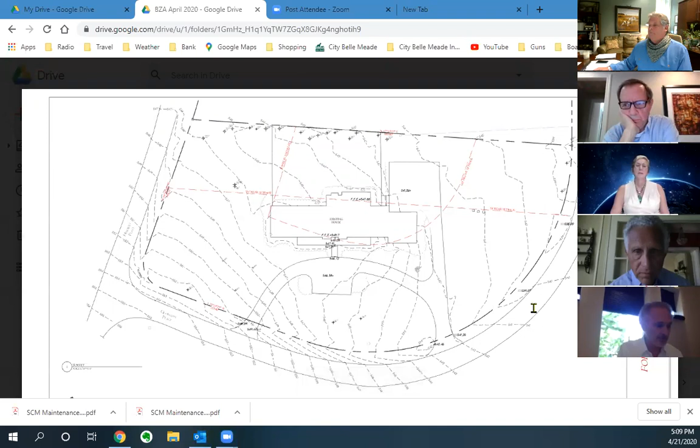Last time we met, I guess we were over at the church, and we submitted it, and our setbacks were such that we really didn't have quite a building envelope. And so we presented the pool, which was on BZA-3 sheet. As you can see, it was fairly close to the back door, and a couple of board members had mentioned maybe moving it out so it wasn't quite as much of a hazard for the residents. So we moved it slightly. It's a 14 by 30 pool.

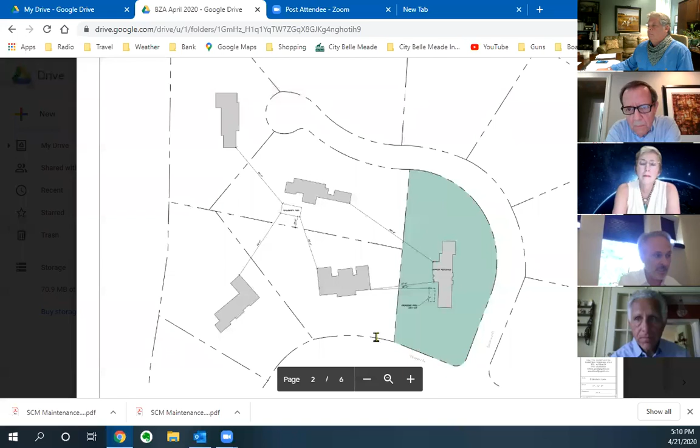And as you can see on BZA-2, the neighbor was actually there last time. They may be speaking today, but we did meet with them, and the pool that's adjacently behind them is about 25 feet off of the property line. We're significantly further away, but our lot is such that the hardship, I think, is that we have space on both sides of the lot, but we really don't have that much of a rear yard.

And so we were asking to get a pool in the rear. All of our numbers and all of our ratios are within the allowable. Our fencing we have going off of the rear of the house. We tried to make the best for a small space that we could.

Thank you, Gavin. Does anybody else want to speak on your behalf or the owner's behalf? I'm not sure today. I know Emily may be on here and Colin, but not sure if they have anything to say.

All mics are open for public comment. No, this is—

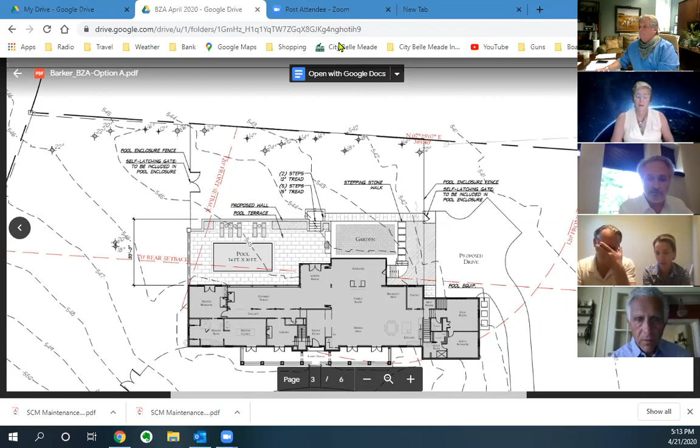This is Joe Dugman. Gavin, the pool is still outside the building envelope, is that correct? It's a little further out. Last time we had about two-thirds that was out, and it may be just a little bit further out. We shifted it about 2 or 3 more feet to the west.

Lyle, can you show us the building envelope on any of these documents? Yeah, it's right there. I'll do my best to outline it here. So this would be the rear setback here, this is the 70. And the front setback follows the curvature of the street that you see here. That is the building envelope.

Are there any more comments or questions from Gavin Duke or his client, from any of the board members? Any questions of them, Gavin? I have a question, Doug. This is Pete Savasky. Is there a wall around that terrace?

It is 3 feet elevated to be level with that rear covered porch, and it's 30 inches, I'm sorry, and we have a railing that goes around it, but there is no wall. Okay, so the barrier is 6 feet tall? Yeah, there's a 3-foot wall on the south side with a 3-foot railing on top of it, so that meets the 6 foot, and then there's a 6-foot fence that goes to the property line.

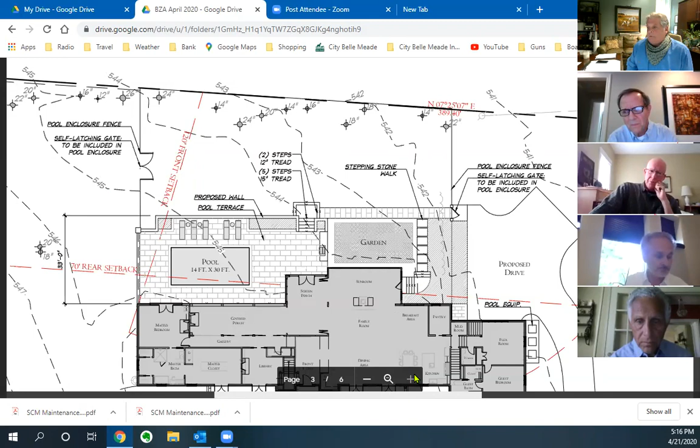And you'll see in the planting plan, which is on BZA 5, that after we spoke to the neighbor, we had evergreen screens on the west side, which is the rear of the lot, and also along Herbert Place. So most of that is evergreen planting that will screen that from traffic and also for the neighbor in the back, and to the north.

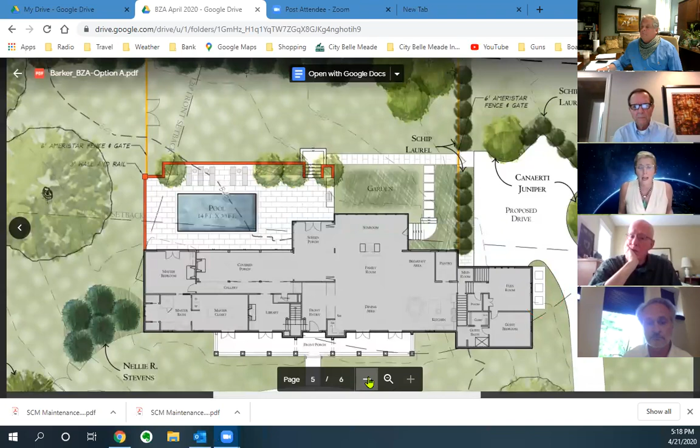Are there any more questions of Gavin Duke? If not, I'm going to... Yes, this is Gloria Sternberg. I wasn't at the last meeting, so I'm not sure what questions were answered in terms of it being outside the building envelope. I realize that it's an unusual lot, but I'm not sure that we've approved a pool outside the building envelope in a long time.

Yes, we pushed it further in toward the house, and it seemed to be a hazard. Maybe they felt it was a tripping hazard going out of that covered porch area. And our case was the fact that we have an adjacent touching lot with a pool that's in further violation, 25 feet from the property line. So we were really hoping we could get a small entertaining element like a pool, because we don't have any place else to put it on this property.

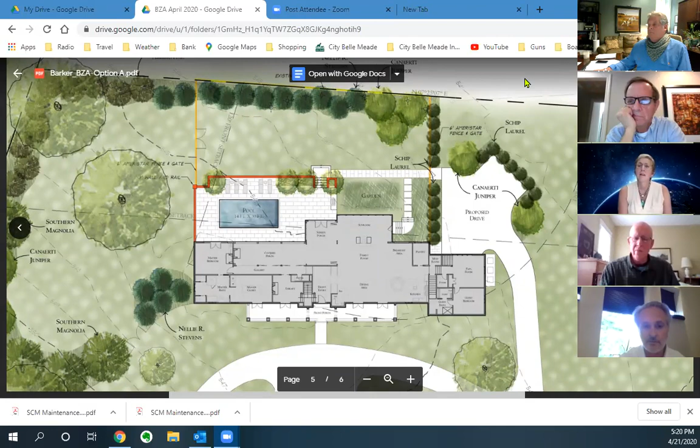When was the previous pool built? This is Gloria again.

Now, Gloria, when you say previous pool, what are you referring to? Oh, the neighbor's pool. That's probably a long time ago. It should be in the minutes of the last meeting that was discussed. This is Colin Barker, owner.

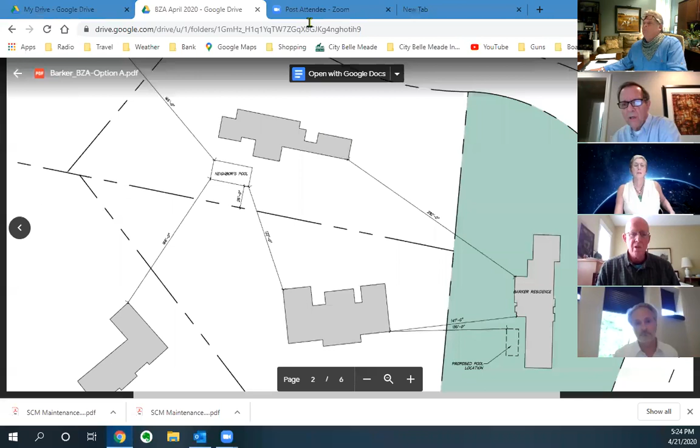Mr. Chairman, if I may interrupt, this is Ted Maiden. I am the neighbor immediately to the west of the Barkers, and by the way, Barbara and I look forward to the Barkers being our neighbors and friends. My wife Barbara was the one who spoke to the board. Just to clarify a point you made a moment ago, we do not have a pool. It is the Nallies who live behind us on Georgian Place who have the pool. And just to clarify a historical matter, that pool has been back there for a long, long while.

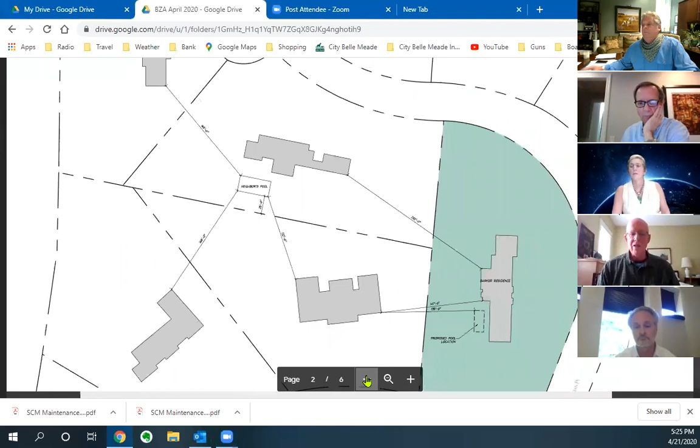Is the floor open for public comment, or is the procedure that the Barkers and their professional guides have the floor? Well, I asked for anybody to make any comments, and I did close it.

However, I don't have a problem if the rest of the board didn't have a problem with this gentleman speaking. Is everybody okay with that? Yeah, I'm okay. Okay, so my apologies, I had to fumble with getting unmuted, so that's on me. I finally figured it out.

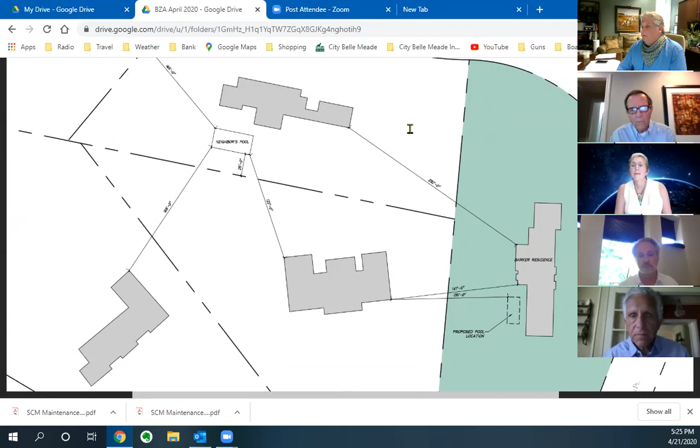I did have an opportunity to send mine and Barbara's thoughts on the matter to Mr. Patterson. If those are already in the record, there's no need that I see to take the board's time and the time of others attending the meeting.

Lyle, do you have his comments that he's referring to? Let me just put this up.

I'm happy to summarize them if the board, the chair sees fit. Go right ahead, just summarize them please.

Sure. Well, quite candidly, our concerns are not those that are immediately before the board. As far as Barbara and I are concerned, that's a decision for the appropriate body to make.

But the circumstances are such that the area of our home most proximate to the proposed pool is our master bedroom and bath. While it is true that the other pool we spoke of may be closer or further, that other pool faces the back of the house, and it has a stucco or somewhat substantial wall of about 6 or 7 feet, so we never suffer a disturbance from any activity emanating from the pool equipment or related activity.

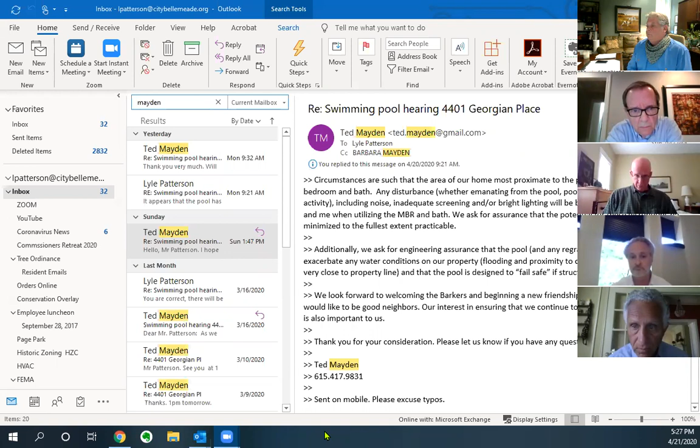So the proximity of our master bedroom does raise some concerns that Barbara shared with the board, and perhaps with the Barkers as well, about noise and screening and bright lighting, that in the event there are any disturbances, those will be borne most acutely by Barbara and myself when we're utilizing the master bedroom and bath.

I'm not embarrassed to tell the board that as we age, we spend more time sleeping and in the bath. In any event, our concern is entirely assurance that the potential for these disruptions will be minimized to the fullest extent practicable.

Additionally, we have an engineering concern, which is something I am way out over my skis on and will defer to the experts present in the meeting, that if there is any regrading or other engineering, earth moving, or the like that does occur in the process of constructing any pool, we would ask for assurance that it will not create or exacerbate any water conditions on our property - flooding, proximity to our septic, which is very close to the property line. And obviously we're confident that the pool will be designed to fail safe if it was structurally impaired.

But as I mentioned earlier, we're happy to let the chips fall where they may. Our concern is the particular circumstances, and that is the proximity of our master bedroom to the pool.

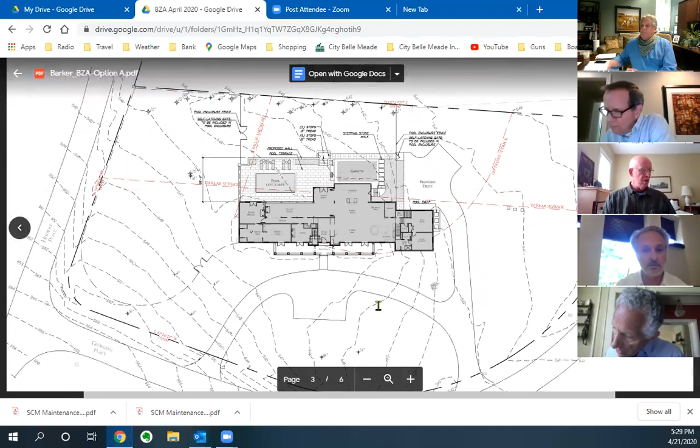Is that correct, Gavin? No, it is before the board. And just to add to that, I think it didn't say so on the agenda - that's the reason I'm confused about it. Oh, it is on the agenda. Yes, I'm sorry, it does say that. My bad, it didn't say it on the sign though.

And just for the record, the civil engineering and the stormwater study is required for a pool, so we will have full drainage.

Anybody speaking, I can't hear him. This is Gavin speaking, right? Yeah, Gavin Duke. Just reiterating the fact that stormwater and drainage would be a part of all this study with the pool, so there would be no more water for that back area.

Anybody else on the board want to make a comment or question? Can you pull up the landscaping plans, Lyle?

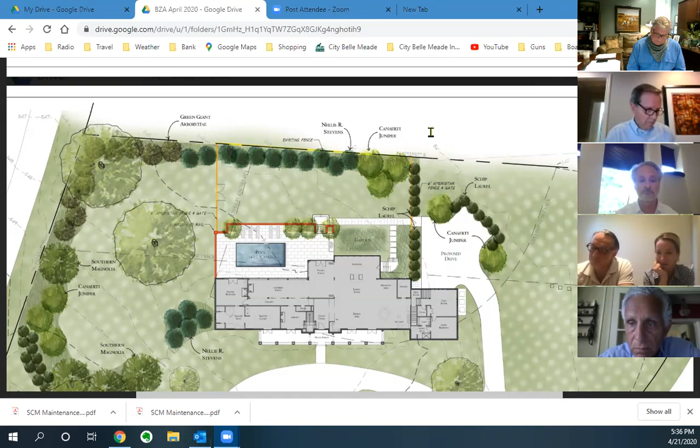But I do not believe that option should be taken off the table. On the other hand, we're not insisting on it. I'm not even sure we have standing to insist on it, but I do think we have standing to ask for assurance that our master bedroom will not be subject to the kind of completely understandable disruption that comes from having a swimming pool, a place where people and children want to enjoy themselves, and we're all for that. But our concern remains singular: that we have the benefit of the free enjoyment of our home, as well as our new neighbors, the Barkers.

Okay, I think we understand your position. Any other board members want to comment among themselves? I think for sure I'm going to cut off the public comment at this point. Yeah, go right ahead, Joe, thank you.

Under the ordinance, one of the conditional use standards is that the board has to find that approval of a conditional use will not interfere substantially with the use and enjoyment of an adjacent property by its owners and occupants. We can agree on provisions for vegetative screening to protect the character of the community, which I guess is not an issue, but I don't know that I'm there yet with the concern of the neighbor. I know, and he's right, neighbors don't really have the authority to dictate what we do, but we certainly want to make sure there's harmony with the neighbors.

I don't know that there's a plan in place right now that would ensure the neighbor's property wouldn't be adversely affected by the pool going in. I just would like to know that there's something else that can be done, if not determined in this meeting, then in another meeting, to make sure we're not going to cause a nuisance for the neighbor.

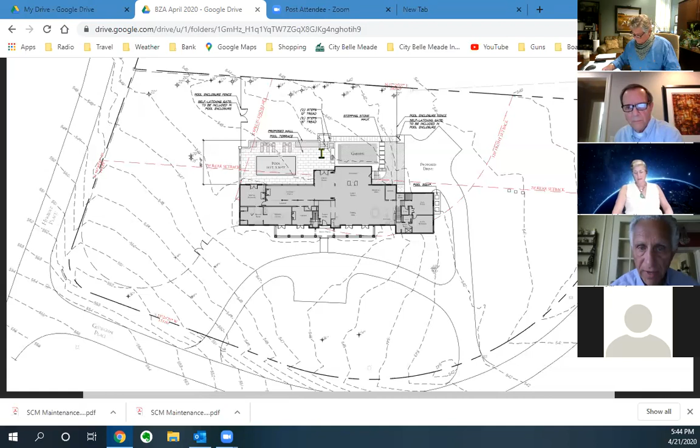Well, throwing that up to the chairman. I don't know, I think Haley's memory is that it was considered, and it didn't come back any different than last time, except the pool was moved out, as I understand the comments. But let's go on ahead—is there a motion before this board?

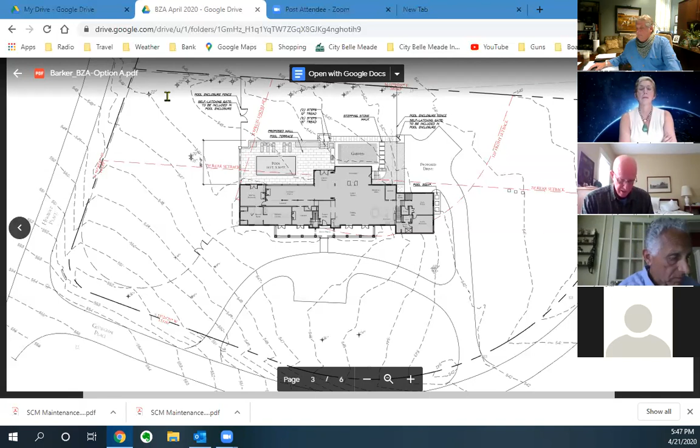But I think, yeah, first there has to be, if there is a motion to approve, then I think you should- there may not be a motion to approve. So, Mr. Chairman, Haley Dale, I understand what Doug is saying, and for me personally, I would love to make a motion to approve that this property qualifies for a variance under the guidelines that Doug just outlined, and then I think we can go from there on the rest. Is that what you're saying, Doug? That's how I'm understanding it. That's Doug's recommendation.

The one reason I would give that advice too is that there seems to be discussion about maybe putting conditions on the conditional use that depend on future conduct and agreement by the parties, and that's yet another complicating factor. That's how I would handle it. I just think it's cleaner to isolate the variance and then do the conditional use criteria. So it's up to you. Of course the chair can entertain whatever motion it wants. A motion to approve the variance would be a proper motion, if you don't mind my saying so. So I guess it's up to you all as to how you want to divide or combine the question. It's up to you.

So Doug, I have a question. If you approve the variance, you're still not locked into a vote on the pool, right? That's correct. The only thing you're doing with the variance is saying you could build it in this circumstance outside of the building setback because of the unusual shape of the lot. And then you're back to a clean slate to consider the conditional use.

Okay, this is Pete Savasky. If we don't agree that it's a variance, then we can't approve the pool. Exactly, so it's over. You can't approve a pool outside the building envelope unless the lot qualifies for the variance. So I think that's why it's important to approve the variance first.

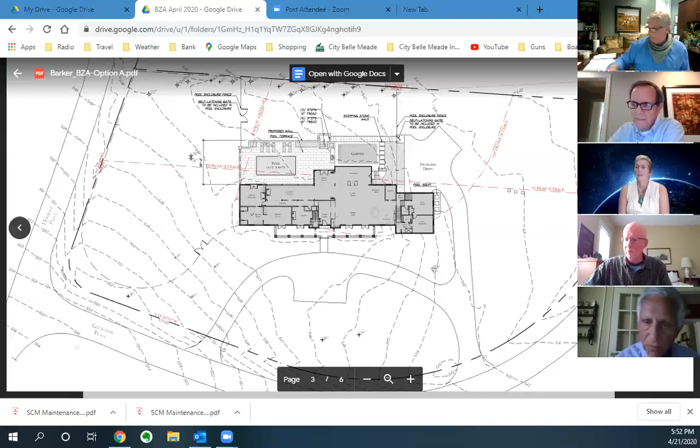So the motion to approve the pool with conditions of a proper buffer has passed.

Where are we here? Chairman, is the line open? Mr. Chairman, is the line open? No, who is this? This is Ted Maiden. Well, we're finished with the public comment, Mr. Maiden. I have no further comments. I'm not sure what you're saying or doing, but I'm sorry, I muted him.

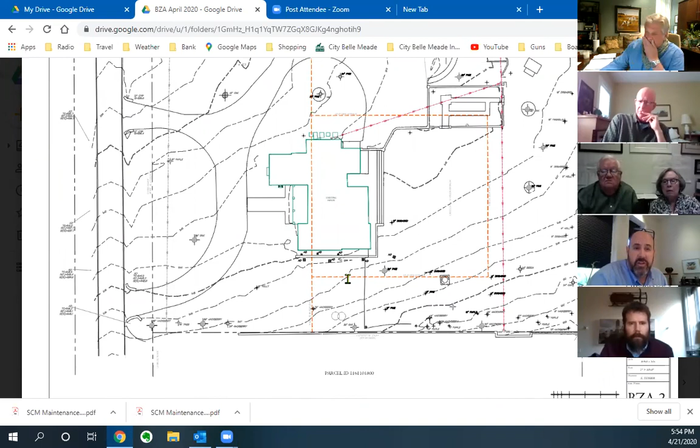One of the things we're here to discuss is encroaching on the front setback, which under the new building zoning code is set at 102 feet from the property line. As you can see on this drawing, the outline in green is the existing structure that sits on the house today. When that house was built, the existing house was 75 feet from the front setback. When we did the calculations, 412 Ellendale is 86 feet from the front property line, 404 Ellendale is 75 feet from the front property line, and 416, which is Dr. Eskin's house, is 130 feet from the front property line. So what we're asking is to encroach on the front setback by 8 feet, so our new proposed setback would be 94 feet from the front property line. We're basically pulling the house—the old house is 27 feet inside the new setback—and we are now going to be 19 feet behind where the old house used to sit.

Part of the other thing we're going to be discussing with you today is replicating an old brick arch detail that is part of the old house. If you could scroll down to BZA number 6, please. Ben, do you want to speak to that?

Yeah, I'm Ben Page, landscape architect, asked to be part of the team for the new house on this site. One of the beautiful aspects of the existing landscape imagery on this property is this existing gate and overthrow in the back, and the zoning committee asked us to replicate that detail, which we're thrilled to do because it's a pretty unique detail that, as far as I know, I don't know of another one like it in Belle Meade.

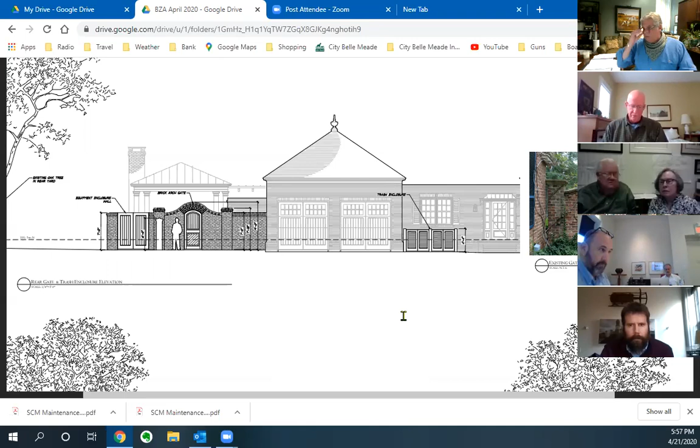So integral to the design of the security around the pool, we incorporated this detail, which is, as you can see on the right side, the existing detail. It is slightly above your existing zoning requirements, starting at 7 feet on the side and peaking at 9 feet in the middle, so the beautiful jack arch detail is 9 feet. We're thrilled to reproduce this as asked by the zoning committee, so that's part of this request.

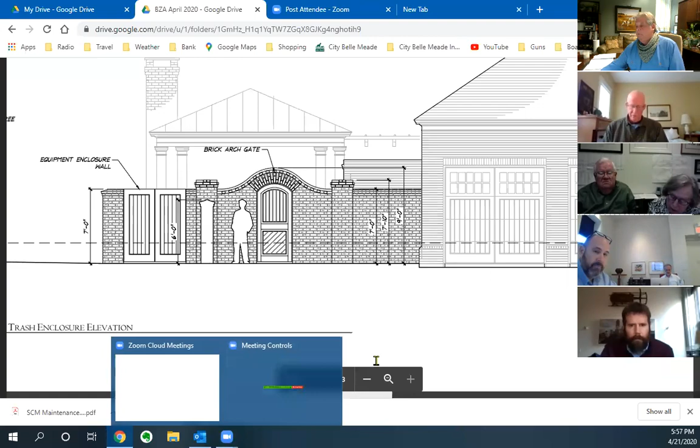And then if we go back to the front imagery of the property, can we go back to BZA 3? Is it 3? Yes, BZA 3, please. There's a small wall that encapsulates the motor court to the left of the property that replicates another small detail. It's a brick wall, and it's 9 inches above your requirement of 3 feet.

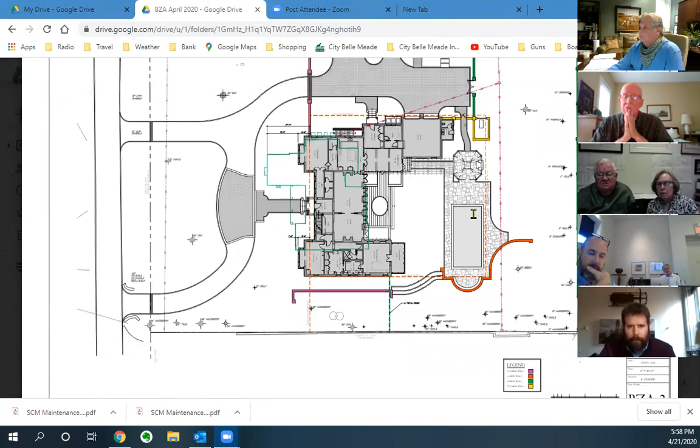And then, if you will, Lyle, there's an enormous beech tree that the pool was predicated on moving away from, which required us to have a retaining wall at the end of the pool. That elliptical apse starts at 3 feet on the left side, rises to 4.5 feet, and then descends again in a linear pattern to a little less than 2 feet, about 18 inches. So that's one of our requests for variance, very specific to the mechanics of that magnificent beech tree.

This property, as you all know, has breathtakingly beautiful trees on it, so we're very conscious of articulating almost everything on this site. The new driveway is actually less impactful than the existing driveway, and we're under the square footage of the driveway that's there now. It's predicated on being very careful around those two magnificent oak trees in the front yard, so we were excited we could be under all your requirements on that.

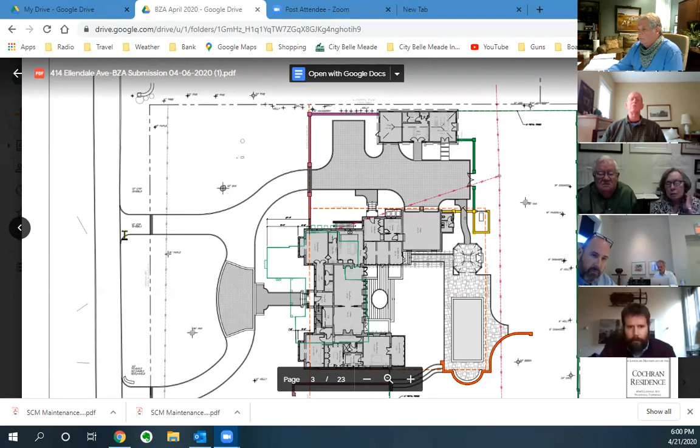So in essence, what we're after is replacing that house with a spectacularly beautiful house that architecture firm from New York, Gil Schafer's office, has designed for this property. We're excited to be part of this project.

If there's anything else that you'd like to know about this, we'd be more than happy to share any thoughts on this.

Mr. Chairman, this is Lyle. I'd like to say that this came before the Historic Zoning Committee, and they approved this demolition and new architecture. What did they approve, Lyle? They approved the demolition for this home and the architecture.

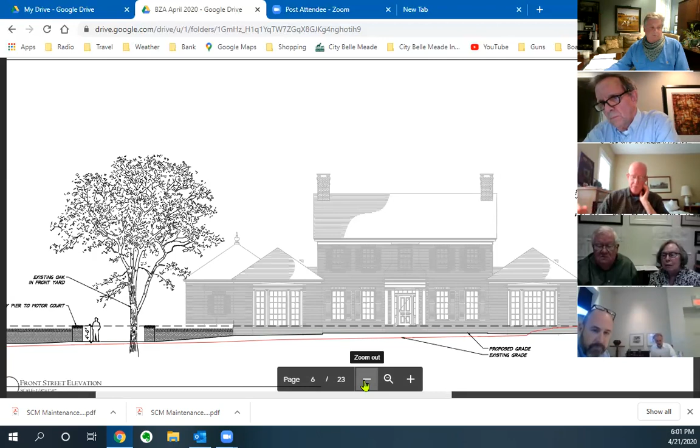Mr. Page or anyone on your behalf want to speak for the owner at this time? Well, if there's anything that you all have in the way of questions, we're certainly excited to answer. But I think this is going to be a hugely handsome addition to the streetscape on this street, and again, we're very excited to be part of this project.

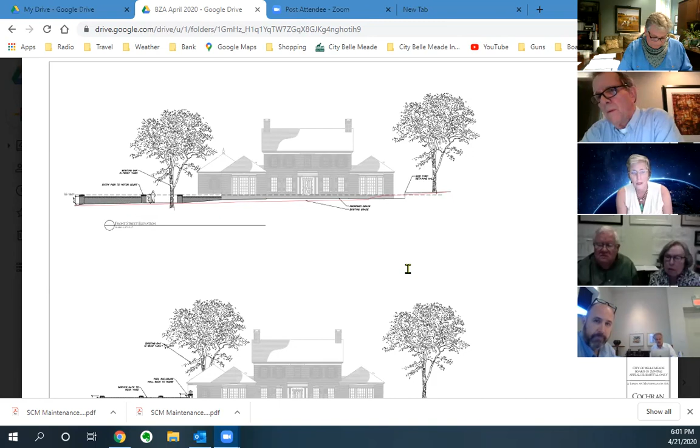Does anybody, any board members, have any questions of the presenter? I'll ask a question, or a couple. Gloria? Yeah, I mean, it mostly has to do with the heights of the gates, and I understand why you want to replicate the beautiful gate that is on the left side of the home at the moment.

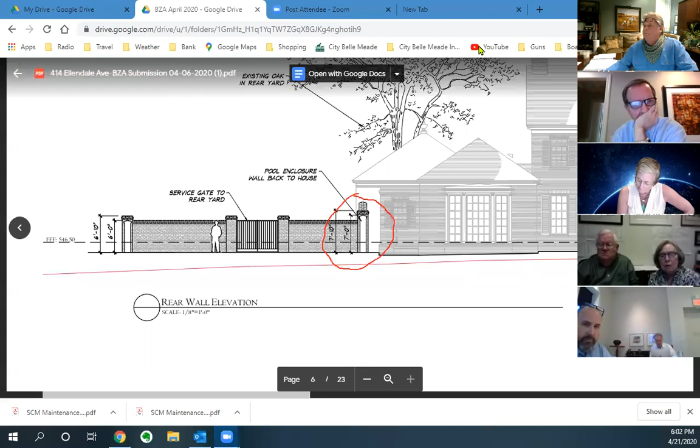That's gorgeous, but is there a way to lower either the arch and then lower the walls to 6 foot walls, 6 foot total including any caps, and also the motor court back down to the 3?

We've really had a lot of issues with walls, and this would, in order to stay within our code, if there is a way to make it structurally as beautiful, then is there any way you can bring them down?

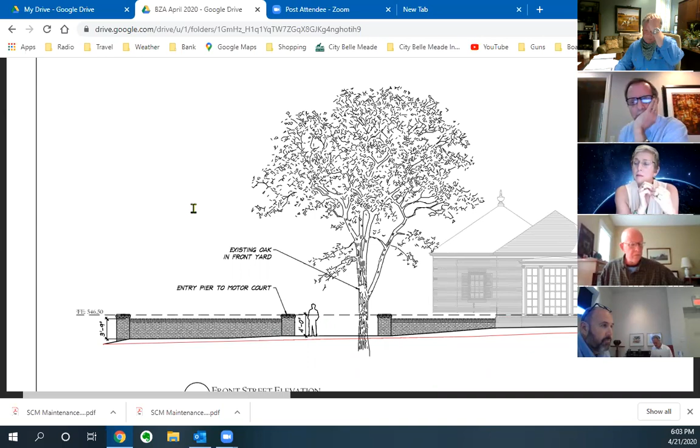Well, we looked at that pretty vigorously. I'm Ben Page, landscape architect. We did look at that, and honestly, if we bring the spring point of the arch down any lower, the arch itself gets to be extremely low. See the 6 foot tall man next to the gate? If you bring the spring point of the arch down, and I know this is exactly why they did what they did when they produced the original one, if it gets too low, you'll actually hit your head going through this gate.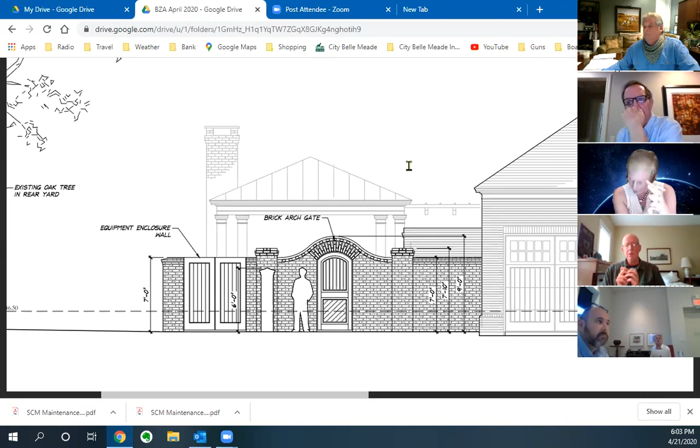So it's just about a 1 foot differential from your normal 6 foot wall. I thought it was 9 feet. Well, yeah, 9 feet, but you want the rest of the walls to be 7. That's the, I mean, if there was a way to bring the other walls back down to 6.

Well, the reason why too for the 7 foot walls around the equipment areas is that there's going to be a proposed generator. I'm sorry, I'm Ed Tesser with Page Duke. The reason why we're kind of pulling that wall over through there for the equipment area to be 7 feet is that a generator is going to be probably living in there, and with the ATS switches and the control panels, they're tall, so usually they'll be sticking up above a 6 foot wall. We need the extra height to be able to hide all that equipment, the transfer switch and those control panels for that generator. That's where the generator and the pool equipment will be housed.

I'm going to show on the site plan in relation to where this is. Yeah, it's behind the garage. Can you put your cursor? Yes, this is Ben Page, it's right there. It really is pretty much almost invisible from anywhere from the streetscape or even from the front corner of the house.

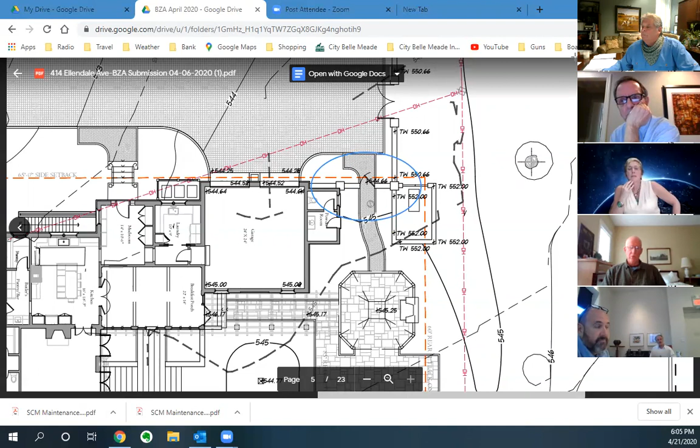Well, I'm not talking about the arch so much as the walls. It's Gloria. Is the walls connecting to that, and also the front wall, getting the front wall back down to 3? Maybe we can get the front wall through. This is Ben Page, when you said the front wall, which wall? The one, the motor court.

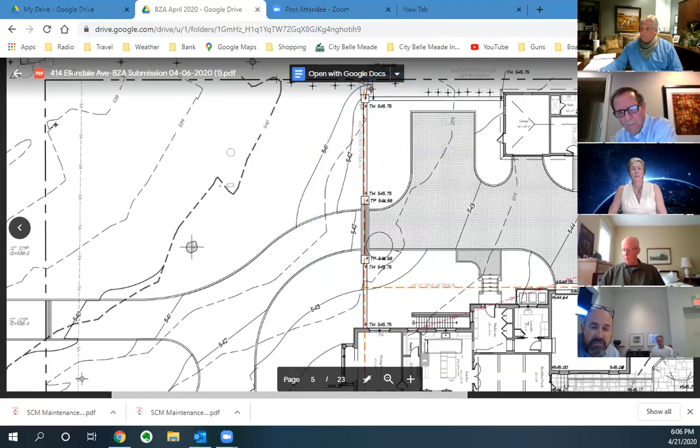Yeah, I'm sorry, this is Tesser again. That's kind of, I mean, if we needed to, we could probably do some things with some grading there. We're just trying to kind of work with some of the grades as it moves towards the side property line as well as that post oak. It was just a matter of not trying to, because when they get closer to the house the walls get real short, so we're trying to do that balancing act. We start at 30 inches at the house, and as we project across there, moving it down with just how the grade starts to descend, that's where the 9 inches kind of grows. So, if we had to, I guess we could bring a little bit more fill in to kind of bring it up, or I was just afraid if we lower it even more, then it's going to get real squatty at the house.

So I have a question when you're ready. Go right ahead, Pete.

Just as far as the wall, best I remember, I went back there and looked, that 7 foot wall does run down the side of the backyard. Is that correct? Yes. And are you going to remove any of that? I'm sorry, this is Ben Page. Remove any of that 7 foot wall that runs down the side of the backyard?

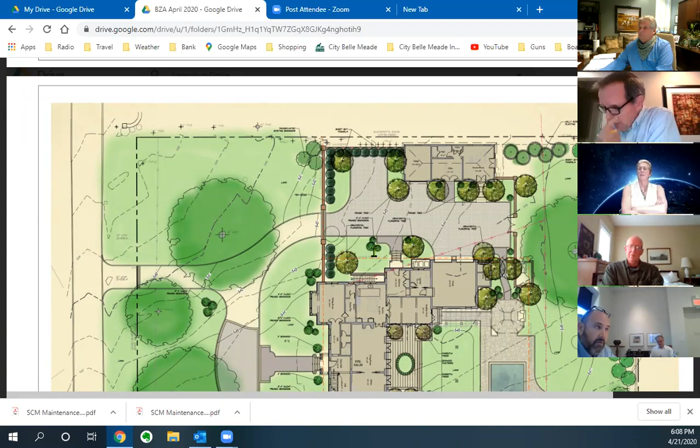So as far as the house, the whole house is going to be demoed? Correct. Is that correct? That is correct. This is Ed Tesser again. We're going to be demoing the whole house and then salvaging the brick off of the house to reuse on the new project.

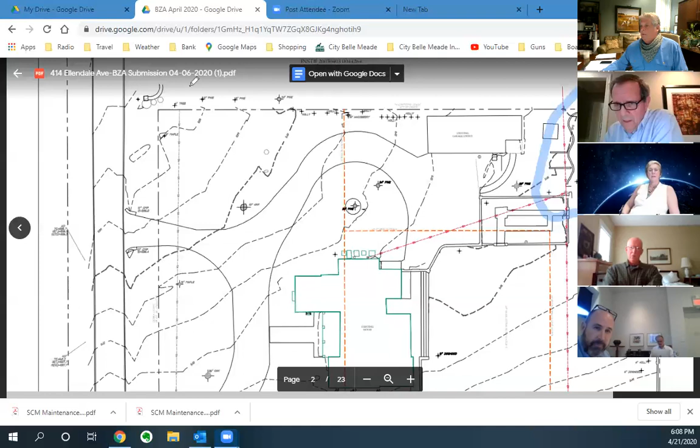I'm not sure I see a compelling reason why the structure has to be in front of that footprint by 8 feet. It seems to me you're stretching it forward just to give more space between the house and the pool. What's the purpose of having it in front of that setback line by, I think you said, 8 feet? I know where it is now, and I understood that, but if you're tearing it down and starting from scratch, it seems to me you ought to be able to build within the building envelope.

Well, one of the reasons we were really focused on that was just trying to give more breathing room towards that big oak tree in the back of the yard, that 36-inch oak.

Ben Page talking again, please. Oh, I'm sorry, no, this is Ed Tesser with Page Duke. To give us some more space between the large oak tree that's in the rear yard, and yes, to give a little bit of breathing room between where the garage structure is going to be and where the pool's going to be.

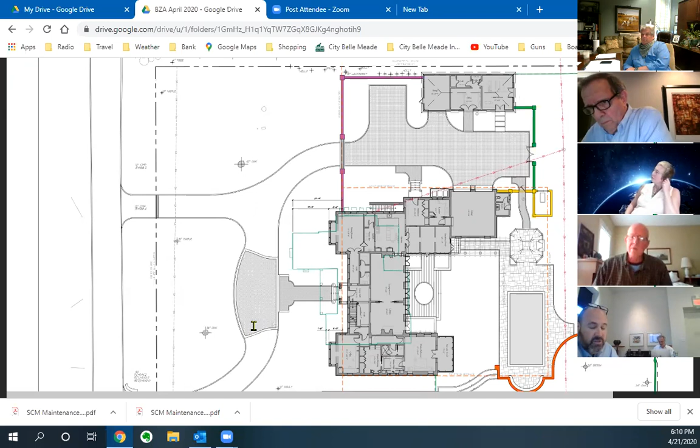And I think we were just trying to also keep the same kind of character. Like I said, the two neighbors to the left of the house are at 86 feet and 75 feet respectively with their setback. Obviously, when you do the averages, you average in Dr. Eskin's house, and he's almost double the feet back from the setback, so it kind of skews everything. So we're just trying to keep things within the same rhythm that you have there, and giving us some more breathing room with those trees in the back of the property.

Okay, two questions. One, Doug, do we have authority to approve a brand new house on a non-variance lot outside the building envelope?

As I read the spec, it's actually—Pete, I was just looking at that, great minds think alike. I was looking at one of the provisions in our special exception provisions of our ordinance that says the construction of—it says an addition, but it also says a new residential structure not otherwise permitted by this chapter may be allowed as a special exception, so long as it doesn't aggravate the existing setback, doesn't extend closer to the property line, or otherwise expand by reason of construction. I guess I go back to this: generally speaking, it does not aggravate the violation that already existed. That's the way I read it.

So even if we've not had the variance, this is not a variance lot. For anything, this one'd be tough. But as I read it—and I'll let Lyle chime in, he's administered this longer than I have—I would think as long as you're rebuilding, you're not making it worse. That's the way we interpret that.

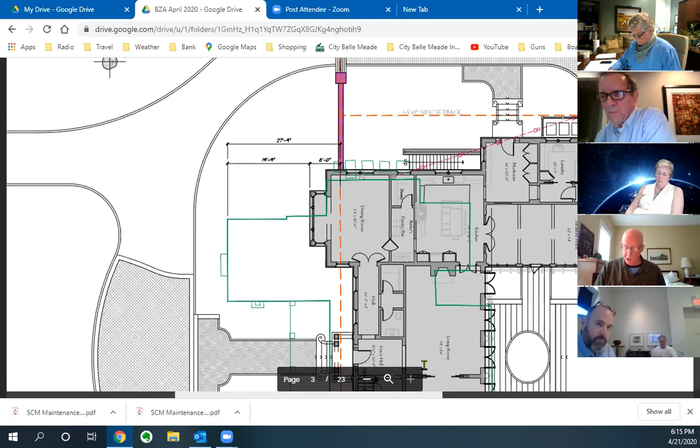It also has to be that the proposed addition will not be out of harmony with the existing development in the neighborhood. The granting of a special exception will not adversely impact abutting properties. The physical characteristics are architecturally compatible, and I think that jurisdiction has largely been assigned to the Historic Zoning Commission now. And the addition will be constructed under conditions and safeguards as the board may direct. So I think this does come within your existing authority under the special exceptions, Pete. As you know, I've not been a big fan of that, but it's still part of our ordinance.

Mr. Chairman, this is Lyle. I'd like to read from the definition section. Under definitions, C, building envelope: the area on a lot available for the construction of a dwelling or other accessory buildings incidental to the same, enclosed by the front setback line, the rear setback line, and the two side setback lines. Then, parentheses W, setback line: a setback line is a line within a lot or site generally parallel to the front, rear, or side lot line, between which is such front, rear, or side lot line, as the case may be. No building structures or portions thereof may be constructed except as is otherwise herein provided.

That's why it's before you, I guess, is the short answer. So we do have authority? In my opinion, you have authority.

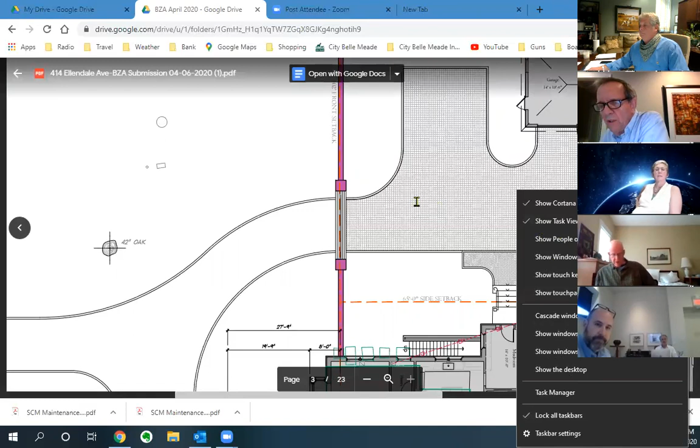Okay, all right, Lyle. One thing that Ed Tesler pointed out is that there's one house on that street that skews the average setback. Can you speak to that? Ed, do we have that in a site plan? Let's see here, scroll up. Yes, next door — that's the Dr. Eskin's house right there, which is next door to our property.

So if you look down below, you can — it's the one on the bottom, isn't it? Right there, that's the one on the bottom. That's the Dr. Eskin's property, which has the 130-foot front dimension to the property line. So you can see that house is probably out of compliance anyway, because their lot's about the same size as the Cochran's, and when you start extrapolating the rear setbacks, the house starts to kind of encroach on the rear setbacks.

So like I said, when you start looking at the other two houses up the street, they're 86 and 75 feet respectively. The existing house was 74. Dr. Eskin's house is at 130, and then we're proposing 94 for our front setback versus the 102 when you do the math and start doing the averages.

Ed, this is Lyle. How many homes did you use for the average? Did you go block to block or 1,000 feet? Yeah, I did block to block because they're even longer. If you start going south on Ellendale, even the one next door to Dr. Eskins is like 122 feet from the front setback. So that's what it starts to — when you're going towards not Sunnyside but Malone, you're all in the 80s. When you start going back towards the south, that's when they start getting longer, in the 100s to the 130s, and that's when we ended up with the average of 102.

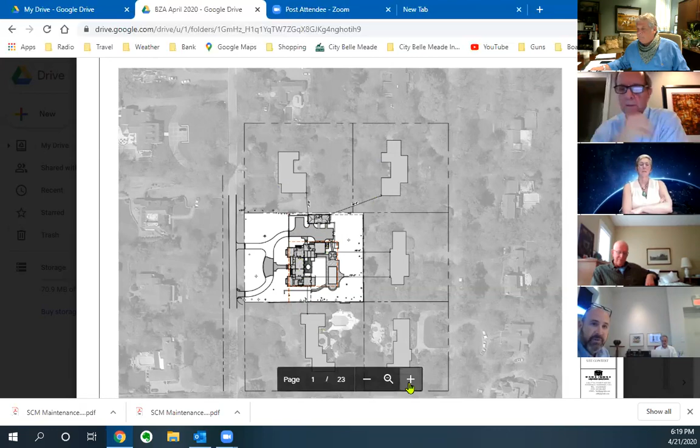Do we have those measurements, or are we just showing these 5 homes that I see? I'm just showing these 5 homes, but I can go back and pull them off the Metro GIS parcel viewer. I just wanted to know how you came up with your average. I did what's in the book. All right.

Is there anybody else on your behalf that would like to say anything or make a presentation? If not, I'm going to close the public portion. Wait, weren't there some folks here who wanted to be heard on this? Public comment - neighbors, weren't there some neighbors who wanted to be heard? Is anybody else in the public that wants to be heard?

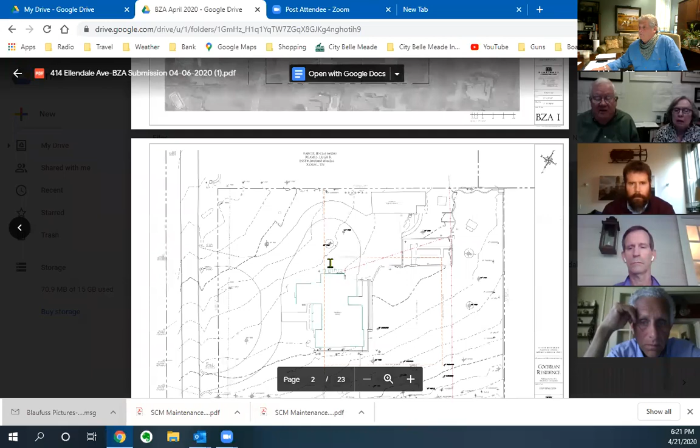We understand why the house has to be demolished, and we have reviewed the plans of the new home that the Cochrans are proposing to build, and are very impressed with it and will be delighted to have them as neighbors. We have two primary questions. One is, how will the wall between the two properties be adjusted to 6 feet?

This is Ed Tesser with Page Duke. What we're actually going to probably do, and I was talking to Lyle about this earlier, is we need to have a 6-foot dimension from the outside to the property. So we're probably going to have to do some kind of wrought iron detail on top of the existing brick wall, in order to make it compliant.

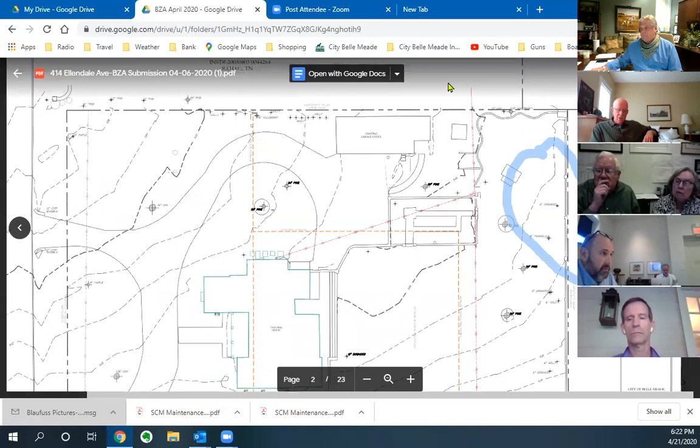One thing I was going to do is walk up on our side and take some measurements from your side to see where the low spots are. As you move north along the property, that wall is going to be 6 feet. It's really towards the south side where the grade rises up on our side, and I wasn't sure if it is retaining on the Blaufuss side of the property. But we're basically going to have to put some kind of iron detail on top of it to make it comply with the 6-foot height, for the pool enclosure.

But that wall is going to remain. There's no intention to tear that wall down. We want to use it and just build upon it to make the pool enclosure. That's very good, and we understand that some type of wrought iron or fixture would be attached to the top of it to make it 6 feet. That's fine. We have a question.

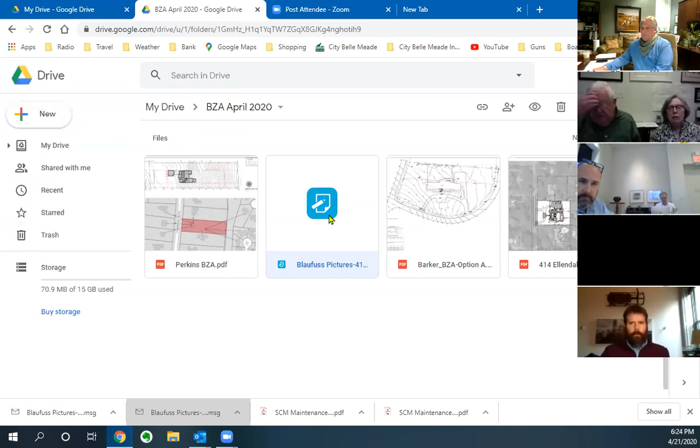When the wall was built, it was on the McDonald property. There was a fire pit or fire fixture where the wall fits perpendicular into the fire fixture. In the BZA 2 plans, it shows the fireplace structure along with the curved wall that was mentioned earlier, the serpentine wall. But in subsequent slides on BZA 3, you can see that fixture, and the curved wall is on to the left of it.

On our side, the wall continues into the fireplace, which is inoperable, but the curved wall continues on our side of the property. The question we have is: is the fire fixture going to be retained? Because you can't tear down half of it, as the drawings show, without tearing it down on our side of the property.

This is Ben Page, and we absolutely intend to leave that corner totally intact because we knew that it would be a very complex thing to remove half of that. So yes, absolutely, that will be a feature in the future. Well, you can come over and replace our curved wall too. No, but the fireplace fixture - that makes sense, just to take down the Cochran side of the curved wall up to where the fire fixture is.

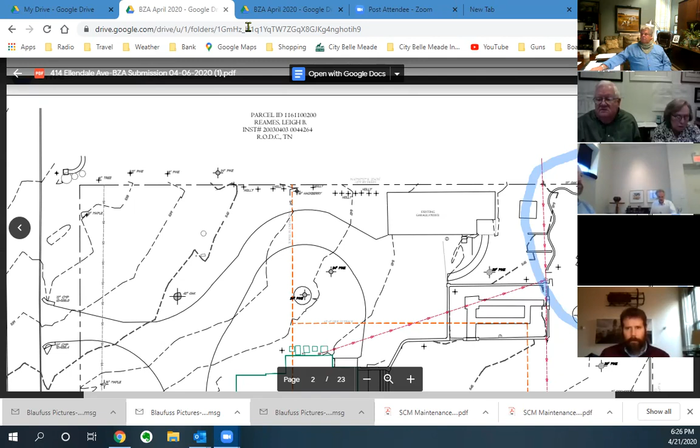Yes, this is Ben Page. One of the principal goals of the backyard, because of the complexity of those giant trees, our first goal is to put all of that power line underground, so there's no longer any necessity to have anything pruned in the backyard. I know you've probably noticed there's been some really unfortunate pruning by the electric company back there, and we're anxious to make sure that doesn't happen again. So I very much intend to make sure underground electric is one of our first goals.

And basically, the trees that are going to be removed are the current pine trees. Exactly, which we're in agreement with. Anyway, so that's very good.

Will any blasting be required in order to facilitate the basement, the pool, or anything? Is there any limestone underneath the dirt?

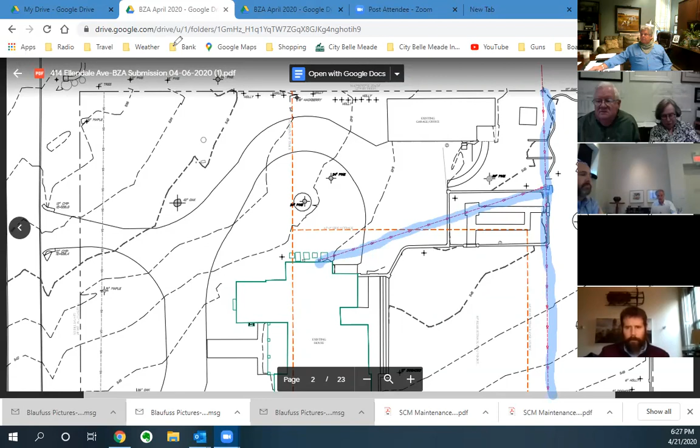I don't know, this is Ben Page again. We have not done any investigation at this moment, but certainly the minute we are approved to do this, we'll do some investigating. We can show you, or not. Well, we can show you where the limestone is on our side, and I'm sure it doesn't stop at the brick wall. So that's just an issue that will have to be dealt with, and hopefully without any damage to any of the neighbors.

What is the timetable for the demolition of the current house?

This is Ed Tester speaking. I believe we had just gotten our demo permit today, so I'd have to check with the contractor to see what the time frame is. The first thing we have to do is set up all of the chain link tree protection and the silt fencing before anything can happen. Then the first part's going to be a company salvaging the brick off of the house, and that will take some time. But I can find out what that timetable is. We literally just got the permit in hand today.

No, it's just curiosity on our part. Yeah, okay, wind it up. Thank you for the information. Anybody else in the public have any questions or comments?

Hey Joe, this is Don Cochran. Can I speak to the setback issue real quickly? Yes. So I'm the homeowner and look forward to moving in there in Belle Meade and Ellendale. As I understand it, and Lyle can correct me if I'm wrong, the setback becomes a function of averaging.

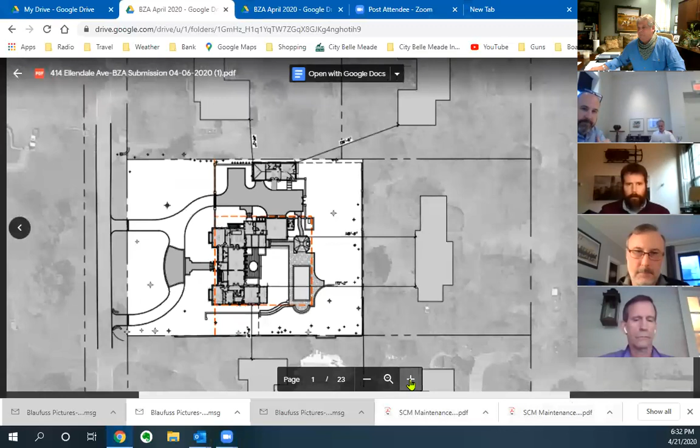Zoom out a little so you can see the property just below the 414. You can see how close the pool is to the back property line. Here's where our proposed pool is, and that's going to be another 20 feet or so, I'd say. So that's already a nonconformance that's pushed this house back further, as well as the pool. I'd say that property itself is pushing us back that extra difference, those 8 feet we're looking for. And we're still back farther than most of those other properties on the street, and it's because of this house that has a pool and a nonconformance.

Does anybody else in the public, or anyone else on behalf of Mr. Cochran, want to say anything? If not, I'll close off the public portion right now.

Okay, members of the board, what are your thoughts? I'm happy to speak. This is Gloria.

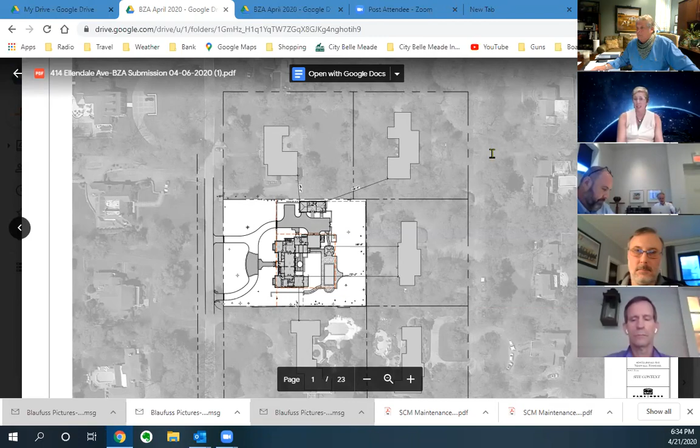There's been a lot of talk about setbacks relative to the street, but in terms of a new build, maybe Doug can address it again. In terms of a new build and the positioning of a pool and the heights of the walls, in a new build you would think you would work within the code. The code has been put there for a reason. A lot of these homes have been there for a long time, before some of these codes were put into place. My concern is that because it's a new build, the code should have been followed.

Well, if it's a question to me, Doug Berry, city attorney, all I can say is that under your current ordinance, which allows this board to grant special exceptions under the conditions I read 20, 30 minutes ago, you may do that. You may not want to do that for the reasons you stated. So it's up to the board.

What you're saying, Doug, this is Joe, is that we have the authority, it's within our discretion to approve it based upon the ordinance. That is correct, but there's a set of criteria you're supposed to consider: if they establish a necessity for it, is it no worse than encroachment outside of the building envelope or setbacks than the existing house was, can it be done in harmony with the neighborhood, and so on. I'm not going to reread all of those, but I think that's something this board does every month, considers and grants special exceptions for both additions and completely new construction. So it might not be wise policy, we can debate about that, but that's something you've got the authority to do.

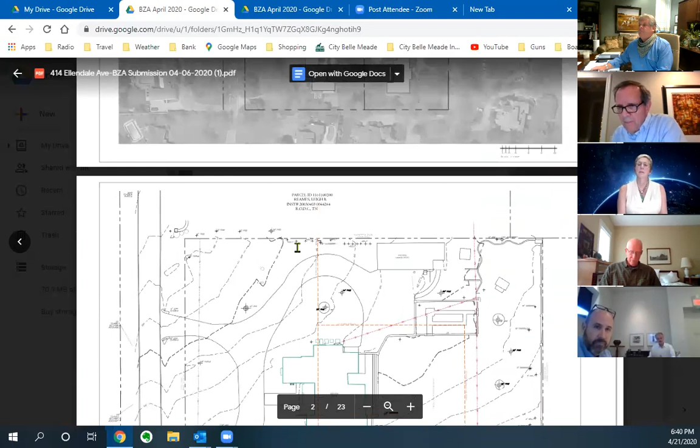Joe, I do have one other question that was brought up, I think, when the Blaufusses spoke, and I'd like the landscape architect to answer it — that's about the wall in the back and the wrought iron fence on top of it. So can we open that up for that question? Certainly, it came after their presentation, when the Blaufusses' mic was open.

Ed Tessier, you want to address that? This is Ben Page, and our intention is to fully bring that into compliance. There's a section of the wall that dips down — most of the wall is 6 feet, but the intention is all portions of that wall will be 6 feet with the addition of a wrought iron cap on top. We do not intend to alter in any way the character of the brick wall. That's a big deal for everybody.

I asked earlier — maybe I didn't ask — about that brick wall running down the left side of the property, the 7 foot tall one. I was told it's going to be removed because it's unstable. Is that right? Yes, this is Ben Page again. That is the intent, and it'll be replaced with a 6 foot high wrought iron fence.

Okay, not a 6 foot fence on top of a brick wall? No, sir, absolutely not. Okay, I'm talking about the low wall. And in the back, between this house, the Cochrans' house, and the Blaufusses' house, that is also going to be a 6 foot high wrought iron fence. That will be a 5.5, almost 6 foot brick wall, but with a wrought iron band on top to bring it into compliance.

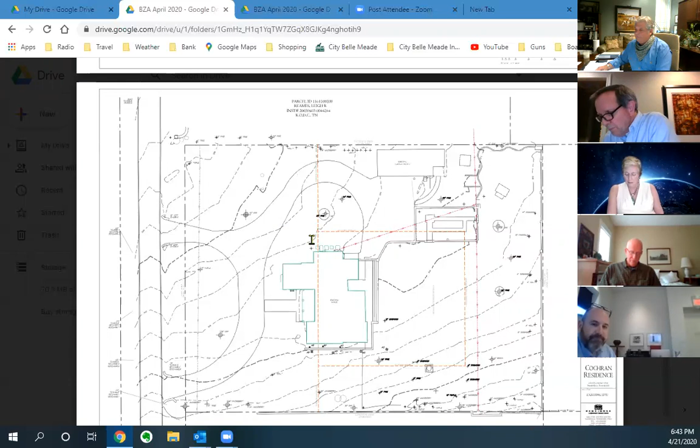Anybody else have any more questions regarding the pool, the equipment, or the walls that Pete was discussing? So we've discussed the footprint, the walls, the 2 walls and the pool cabana. What about the pool cabana? Where is it? Can you show us that? That would be right here. Everybody see the blue circle? Yes. Okay.

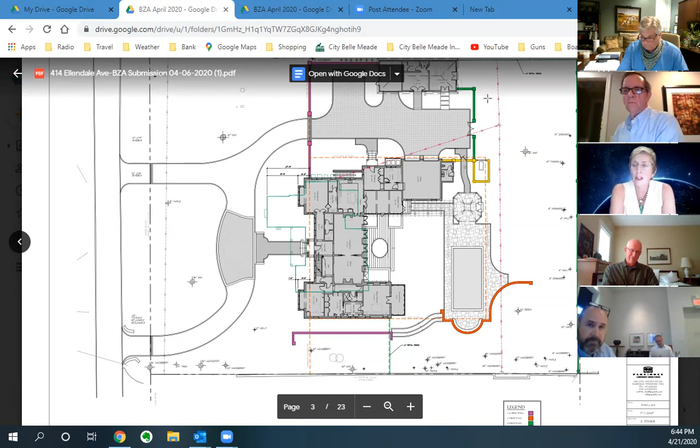Anybody else? Any other comments or questions from the board? It's Gloria. Can we just go back to the retaining walls, the motor court wall, and the 7-foot wall? Can you point out the front motor court wall? I'm going to zoom in on it. It is 3 feet 9 inches, with the columns at 4 feet. Ed Tessier mentioned he would raise the grade on that left side to bring it up to 3 feet, so that the wall would only be 3 feet. Is that right? Yes, that's what he said.

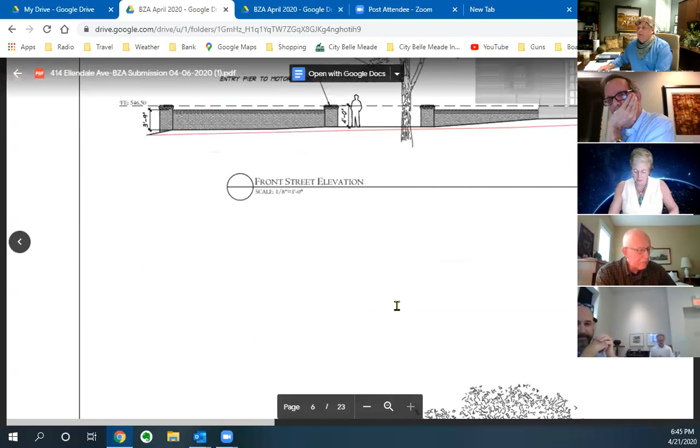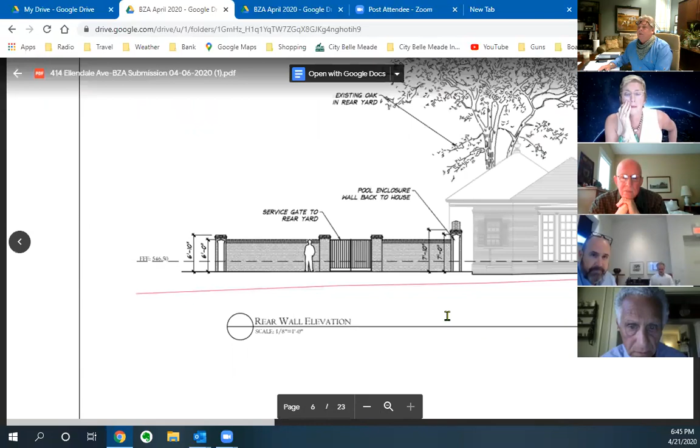And there's no way to get that back down. Are you speaking about the gate? No, the wall. She's talking about the 7-foot portion, 7-foot 10-inch. I'm sorry, could I say something? Well, just a minute, Gloria is talking right now. All right, there's the 7-foot wall with the arch.

Now that is a view looking from the accessory structure back to the pool cabana. So the whole wall is not 7 feet? It's just this section, is that what you're saying? That's exactly right, yes ma'am. Okay, well that's better. It's only the section that entails trying to replicate that historic detail. That's the only section right there. This is behind the house. This will not be seen from the street, only from the accessory structure, garage, motor court. Right, okay.

Since it's open, let me ask one other question. Why was that accessory structure taken off the agenda? Pete, if you don't mind, I'll speak to you after the meeting about that. I have some thoughts on that. Okay.

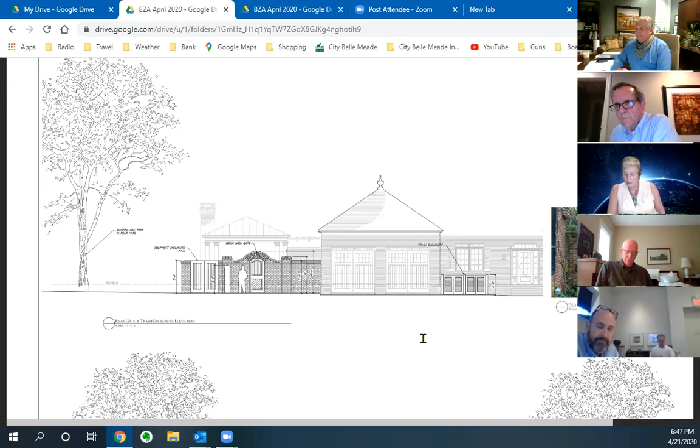Any other board members have any questions or comments? If not, is there a motion? You want to break them up, Joe, or one for the whole? Well, it depends on your motion. If you have a motion as to specific items, you can address that, or if you've got a motion as to the whole request, you can do that as well. Well, it's Gloria, I think since we have at least a change in the front gate, down to 3 feet, we need to split them up.

Okay, you want to make a motion? Or anybody else? Well, I'll make a motion that the wall, to approve the wall in the front. Can we start A through E? Okay, do that, go ahead. Let's start with A, if you want to combine. Roll call, starting with A. Yeah. I'll make a motion to approve A and B as submitted. Is there a second? I'll second it.

All in favor? Aye. Gloria, aye. Haley? Is Haley here? Haley's kids may have kidnapped her, I think. Well, I'm an aye. Okay, I'm an aye as well. That's 3, all right, that's a quorum.

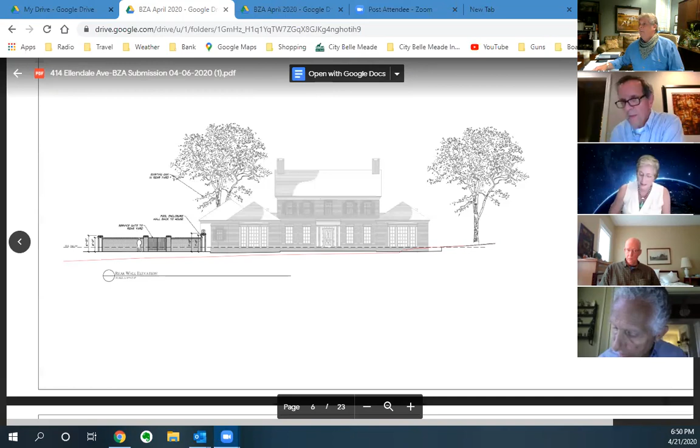All in favor? Pete, are you in favor? Aye. Gloria? Aye. And I vote yes. Okay, everything passes as presented, except for the non-conforming structure, which is a garage, which has been deferred. All right?

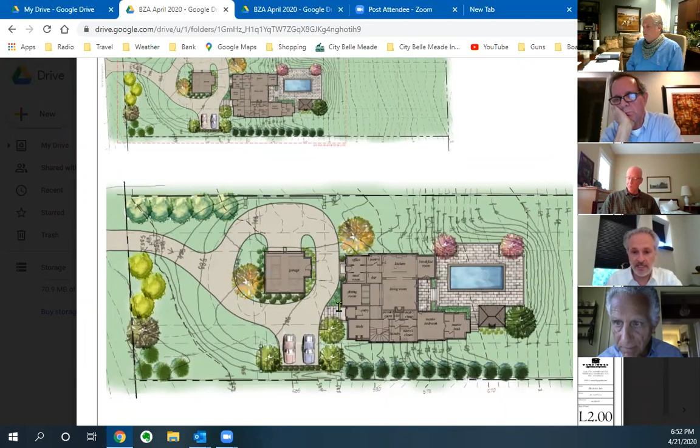You can see what we would like to do is have the pool and there's a cabana. Everything is within the building envelope, and the pool equipment is underneath the cabana that's on that back section of the pool.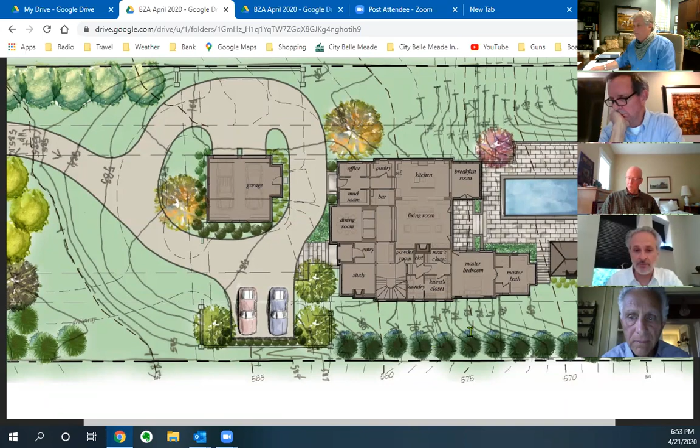The grade change, I think there's a diagram in there, Lyle, that shows the grade change. And Mamie, I think Mamie Koska is on here, or Mamie Finch, sorry, is on here for our firm to talk about the grade differences as well. Yes, this is Mamie Finch with Paige Duke.

The main grade change issue that we had in the front was trying to get some additional parking in that circular drive. Our numbers are well within the allowable for a front driveway and for the overall driveway, but to get in and out of the garage area and have some parking, we're retaining a little bit of grade on either side of the property.

And so we're exceeding the 24-inch grade change allowable with some low retaining walls. Our retaining walls will not exceed 30 inches, or 36 inches excuse me, on those two parking areas, but we do move more dirt than 24 inches in the purple areas of that zone. It's about, I think it says, less than 4% of the whole lot, so it's not a substantial amount, but it is more than the 24 inches.

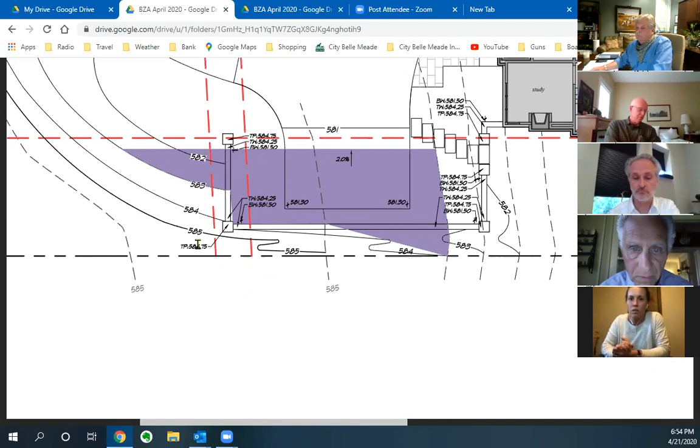Yes, and those walls, Gavin Duke, those walls are under 3 feet. And then in the back, we have a lot of grade change, which incurred some retaining walls to hold the pool up. I don't know if you want to go back to that area, Lyle. I'm sorry, Gavin, I was handling that. Would you tell me that again? In the back by the pool, the grade change for the back area.

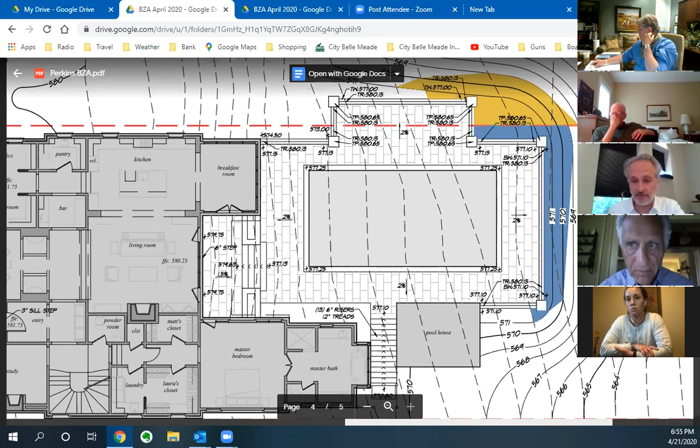Yes. You can see that we're trying to keep our grades sort of 3 to 1 or less than 3 to 1. And then we've got minimal deck area and pool. We do have a pool enclosure, this wall I believe should be right at 6 feet. So we have that covered with the wall that is retaining.

And then we come over to the section by the pool pavilion, and there will be a fence and gate at the bottom of the steps, so that is a pool enclosure for the whole pool area. And again, the pool equipment is up under the pool cabana. This one is directly across from Gavin's house.

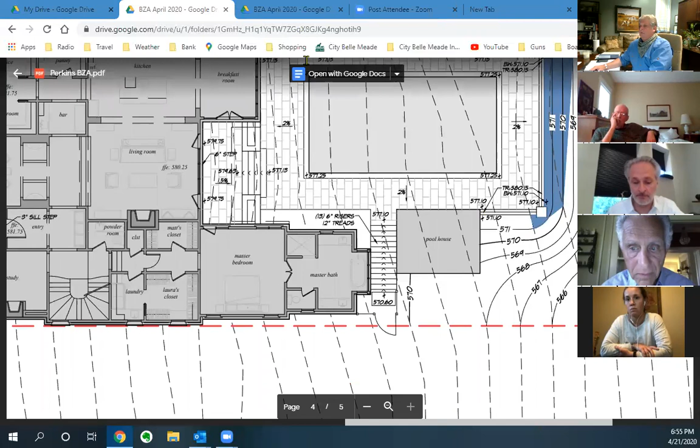And then we may want to go back to the landscape plan. Lyle, Gavin Duke again. All right, just a second, I'm muting a couple people, I hear some background noise. Landscape plan, Gavin? Yes, sir. Thank you. All right.

Gavin Duke here. We're trying to keep the neighbors with evergreen screening on that south side of the property line. And I don't know if on the north we had some planting as well, I believe. No, we will have.

I believe that addresses most of the issues that we had: the grade change, the pool, and the accessory structure. This is Joe Dugman - explain exactly why you need a grade change. I'm not sure I understood it.

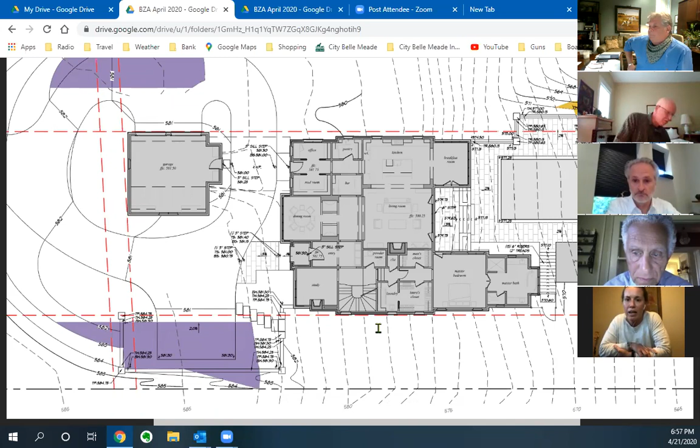This is Mamie with Paige Duke. Are you talking about the grade change in the front, over the allowable grade change? Yes. The front two areas within 20 feet of the property line have a 24-inch maximum grade change allowable. Pretty much across our whole site we've got a consistent slope, and so to get a parking pad, to get in and out of that garage, we need some reverse room to move a car, and to level that pad out to where we don't have a significant slope from side to side.

We're trying to level that area out, and it exceeds the 24 inches. By how much? 21 inches above, so we've got 45 inches total. They're 21 inches above the allowable of 24 on a buffer that runs around the property 20 feet. And that's necessary to level the driveway? Is that what you're saying? Yes, and they have a retaining wall - I'll circle that. We have a retaining wall here to retain that earth. 21 inches plus 24 is 45 inches. The retaining wall is 45 inches. Oh, I thought... No, the retaining wall is going to be probably 36 inches. Okay, she said.

This is Gavin Duke, and to add to that, Lyle, we should be 5 feet off of the property line to stay within our code requirements. That is correct. And can I ask a question? Certainly, Gloria. Go right ahead.

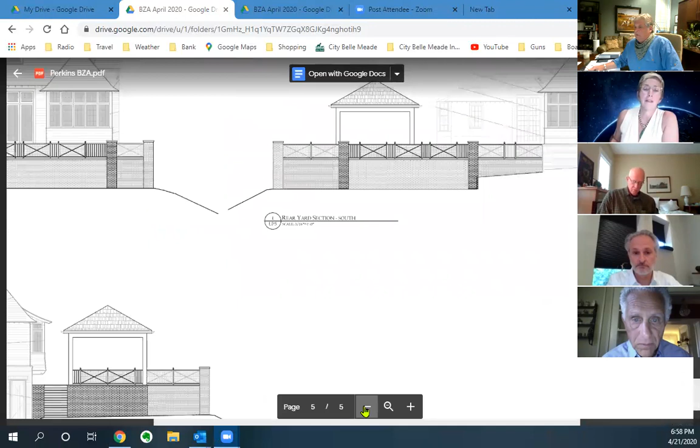And the rear elevation, can we look at the rear elevation? Where it drops off like 15... Well, the rear, I'm sorry - this wall here, this is the pool, right? This is the rear, correct. Here. And I know there's some grading here as well. And what is the height of this wall? This is Gavin Duke, that wall should be 6 feet. We try to keep that at 6 feet.

With the metal on top? Well, it's 6 foot of wall, and then we have the iron on top of that. So 6 more feet on top? No, it would be 3 feet of railing. That's a barrier for a raised terrace, anything over 30 inches.

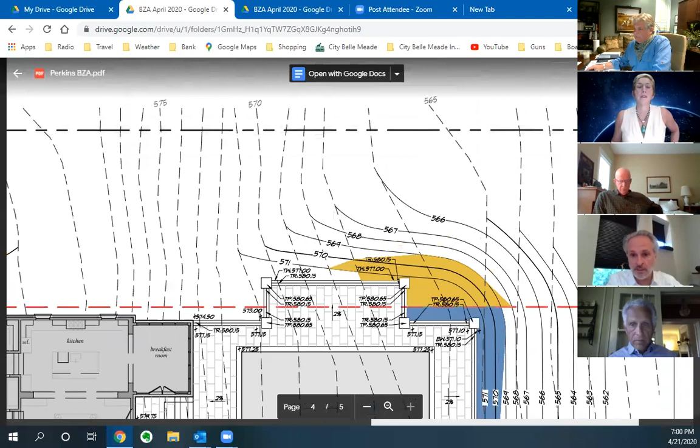Okay, and you want to talk about all this grading here? Because it drops off quite a bit, 15. They actually have a legend right here. Yes, so as you can see inside the building envelope, they are over 40, which is their maximum allowable. Is that correct, Gavin? Mamie, you may have to speak to that. This is Mamie - yes, the gold color is outside the building envelope, but inside the 20-foot buffer.

I think I've got that all worked out. So that's the amount that we are exceeding that allowable. And then the blue color is where we're over the height of grading within the building envelope. Those are the two variances, for how much they're over.

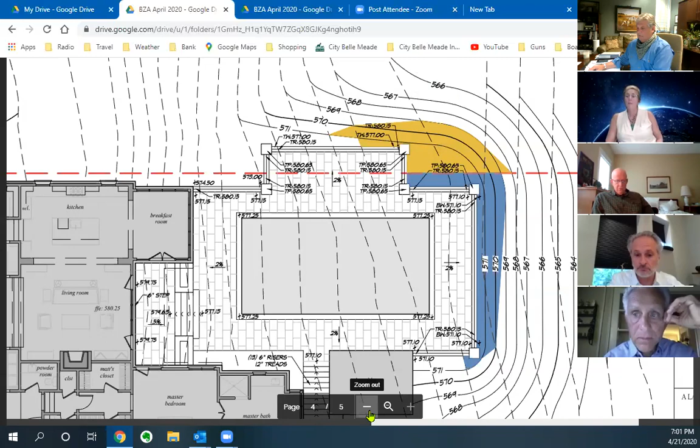And this is Gloria - stormwater plan? This is Gavin Duke, we will have that. We've got a proposal, and that'll be part of the permitting process. Gavin, I'm going to correct you - this is Mamie, the stormwater has already been done on this project. It has been done, but we were not a part of that process. But this grading plan aligns with the stormwater plan that was submitted and approved.

This is a severely sloped lot from front to back, and it poses a real challenge, not only to build a house, but to put this out there and try to do your best to meet the wall requirements as well as the grading. Personally, I think they've done a good job. As Mamie just said, this has gone through stormwater, and any sort of drainage issues whatsoever will be addressed by our city engineer, Steve Casey.

Evan, you did say those front parking pads, both of them on both sides of the house, they are 5 feet from the property line, both of them. This is Gavin Duke, yes, the parking pads are, and the driveway. So the pad, there is 5 feet between the end of the pad and the neighbor's yard. I believe that's correct, I don't have a scale there, but that should be correct. We will be 5 feet off. Okay.

You're 5 feet off on the south side, but not on the north side, so that'll be corrected.

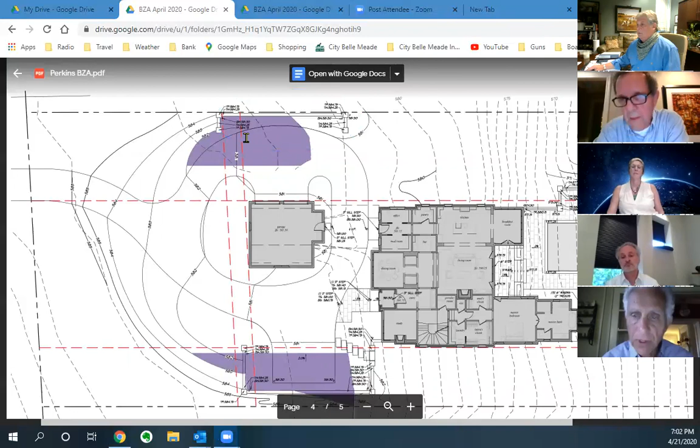Okay, if not, I'm going to close the public portion off and have the board, the three of us that are left and have not been kidnapped by children, discuss this further. Anybody have any comments or questions among ourselves? No, I think it's a good conditional use, special exception, and variance. They all were needed, and they decided.

I'd vote if you're ready for a motion. I'm ready for a motion. It's 7 o'clock, I'll make a motion to approve as submitted. I'll second it. All in favor? This is Gloria, aye. Pete, aye. Gloria, aye. And third will be me, so I'm aye, and I'm ready for a glass of wine.

Oh, there. Thank you all. Thank you, everybody.

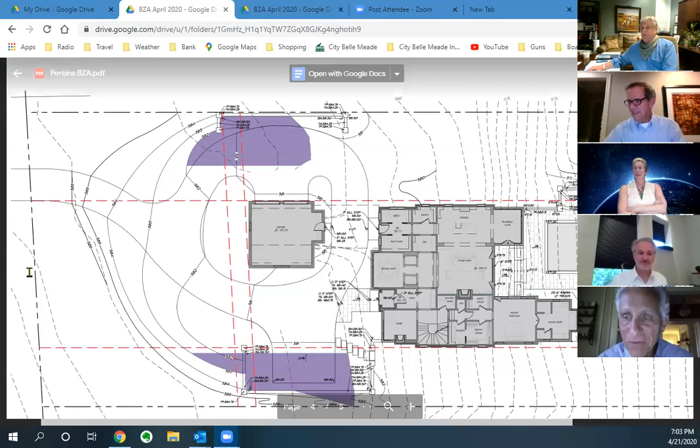Thank you. Before we adjourn, Lyle, are there any, Edie, do we have any minutes to approve? Mike is off. If you'll give me just a minute, maybe she'll come in here and let you know.

I don't remember receiving any. Does anybody remember getting any minutes? No, I don't think so. Gee, I don't remember either. We missed last month, so we didn't. Yeah, so we've approved. I think we did get minutes for February, but I don't remember. The minutes are from February because we did not have a meeting in March.

Right, yes. So does anybody, shall we read the February minutes quickly, or you just? We can defer it till next month. And if nobody has them, I have them, but I don't want to be the only one that has read them and approve it. So if nobody has read them, then is there a motion to defer the approval of the February minutes until next month? Yeah, there's a motion. I might make a motion to defer the minutes. Second, Gloria. I would approve as well, 3 in favor.

Is there a motion to... let me ask one other question. Lau, you want to confirm what the last minutes were? Did we approve January's? I don't remember that. And can you confirm with Edie that we only have February's to. Edie, could you come in here, please? She's going to grab the file.